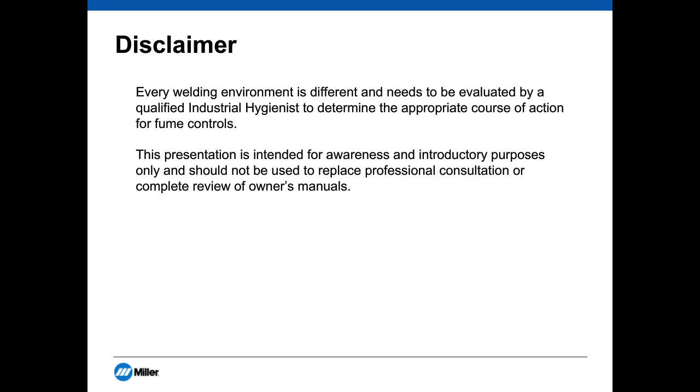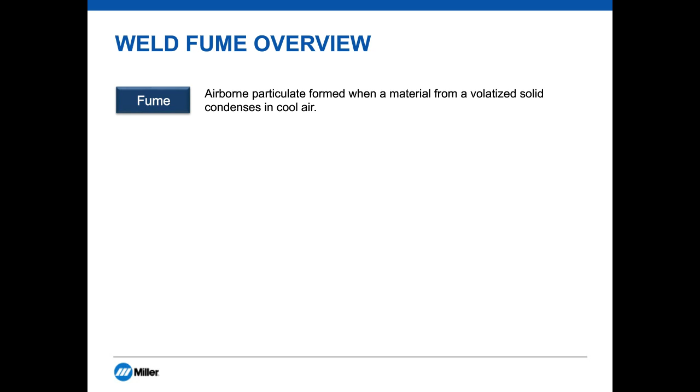The next term is a gas. We all know what gas is. It's one of the 3 basic states of matter: solid, liquid, or gas. Technically, the definition reads, it's a state of matter in which the material has very low density and viscosity. It can expand and contract greatly in response to changes in temperature and pressure.

A mist is a suspended liquid droplet generated by the condensation from a gaseous state to the liquid state, or by breaking up a liquid into a dispersed state, such as by splashing, foaming, or atomizing. Think of water mist.

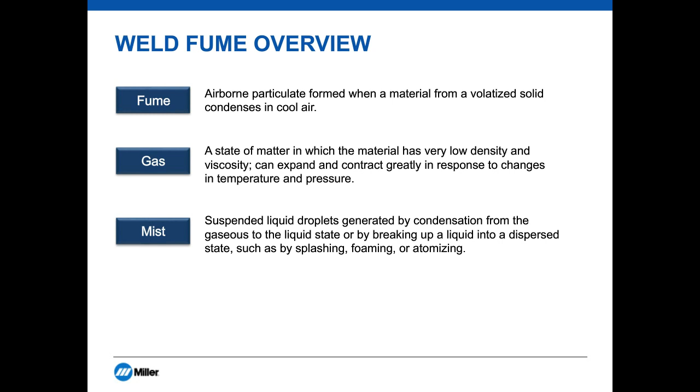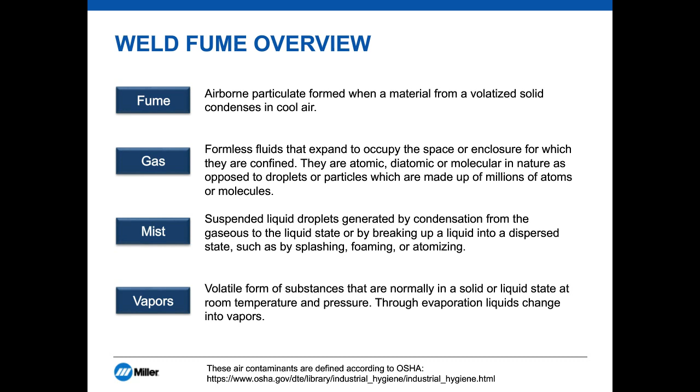Then a vapor. A vapor is a volatile form of a substance that's normally in a solid or liquid state at room temperature and pressure. Through evaporation, liquids can change into a vapor. Again, think of water vapor as opposed to water mist.

Let's talk about weld fume factors that can impact an operator's exposure. First is the type of welding process. We're going to talk more about these later in the program. Examples are arc, MIG, or TIG welding. The second factor that can impact an exposure is the base metal or filler metal used, and we're going to talk more about this in the next slide.

Thirdly is the location. Is the welding being done outside or is it indoors in an enclosed space? Fourth, welder work practices.

Fifth is air movement. Are there cross drafts in the room, or is welding occurring in a dead air space? And lastly, use of ventilation controls, either general ventilation or local exhaust ventilation.

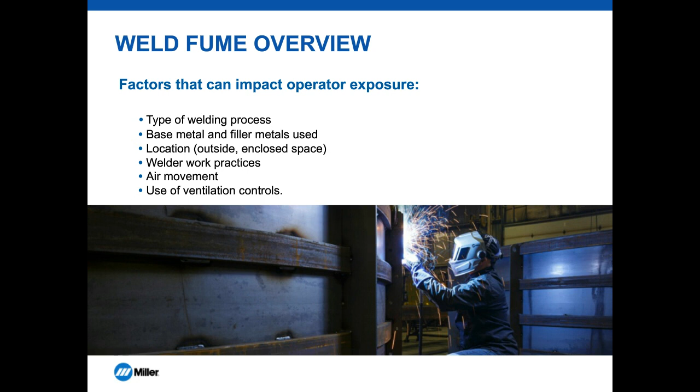I talked about common metals associated with welding. Let's talk about aluminum, mild steel, and stainless steel. These are the three most common base metals that people are welding on. Below that you see iron, nickel, and copper. These are some of the metals included in the welding electrode, whether it be a stick electrode or a wire electrode. I could add manganese, which we're going to talk about a little bit more later in the presentation.

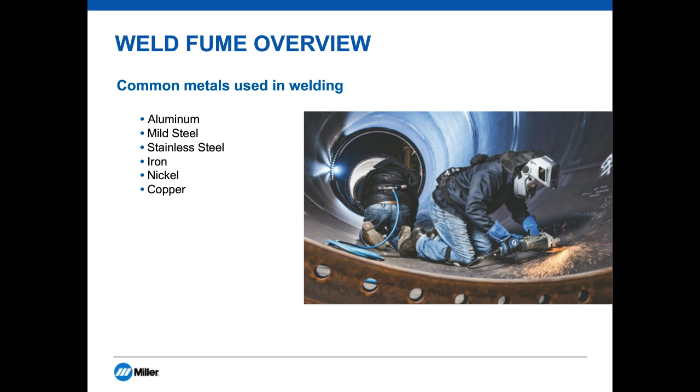There's several issues we can talk about in welding. How much welding is being done, for how often, and for how long. Again, what type of welding is being conducted? I already mentioned MIG, TIG, flux core, subarc. All of these generate different levels of fumes and different types of contaminants.

What is the base metal? Mild steel or stainless steel? There's a huge difference in fume generation depending on the base metal. I'm going to talk more about hexavalent chromium later in the presentation.

Where is the welding being conducted? Is it a well-ventilated area or a restricted or confined space? When are there changes that impact your environment? Is it a new or reconfigured workspace? Is there new equipment, new applications? Is it slow production or increased production? All of these are going to affect the level of weld exposure.

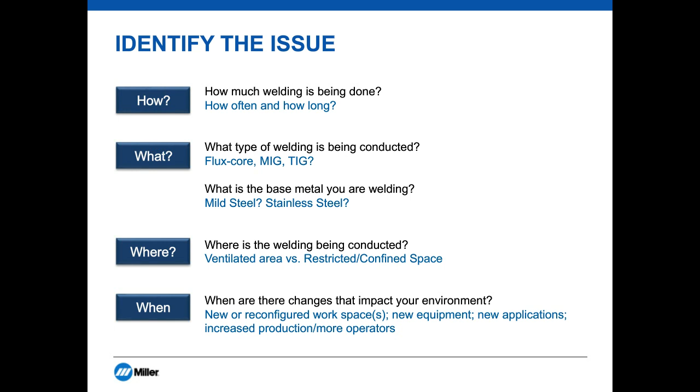Now let's talk a little bit about occupational exposure limits. There's lots of different occupational exposure limits. NIOSH sets limits. The American Conference of Governmental Industrial Hygienists sets limits. And then there's OSHA. OSHA has permissible exposure limits. OSHA, of course, stands for the Occupational Safety and Health Administration and enforces exposure limits for each individual metal, metal oxide, or gas found in the weld plume.

Two of the most important of these are hexavalent chromium and manganese. In 2006, OSHA issued its standard for exposure to hexavalent chromium, 29 CFR 1910-1026, if you want to look it up. It established a permissible exposure limit of 5 micrograms per cubic meter and an action level of 2.5 micrograms per cubic meter. Pay attention to those units. Again, these are in micrograms, not milligrams. Most occupational exposure limits are expressed in milligrams per cubic meter. Hexavalent chromium has a very low limit, so it's expressed as 5 micrograms per cubic meter.

Manganese is present in all welding electrodes, whether it be stick or wire. The current OSHA PEL for manganese was set all the way back in the 1970s, and it is a ceiling limit of 5 milligrams per cubic meter. A ceiling limit means that at no time should it ever be exceeded.

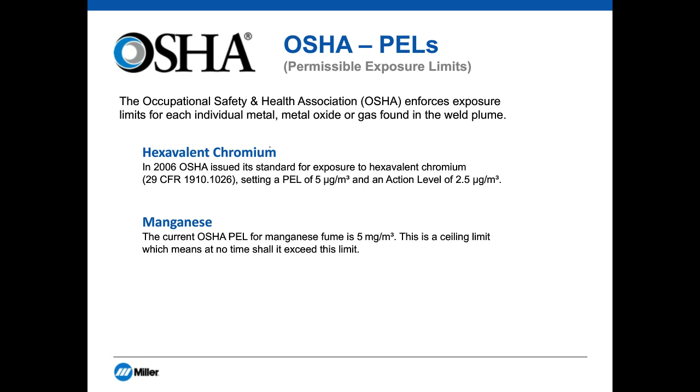A little while ago I mentioned threshold limit values. These are the limits established by the ACGIH, the American Conference of Governmental Industrial Hygienists. This is a professional society, not a governmental agency. This organization has been around since the 1950s, establishing the threshold limit values. When the OSHA Act was created, they adopted the 1968 TLVs, codified them, and wrote them into law. They adopted the numbers but changed the names from TLVs to permissible exposure limits. Over the 40 or so years since the original OSHA Act, there have been many updates and changes to the TLV list, so that now the TLV list is quite different than the current PELs, the OSHA limits.

For example, again, hexavalent chromium. In 2018, the ACGIH adopted a new TLV for hex chrome set at 0.0002 milligrams, and again, that would be 0.2 micrograms per cubic meter. For manganese, the ACGIH TLV changed to 0.02 milligrams per cubic meter as total particulate. So now the manganese limit is 250 times lower than the OSHA PEL.

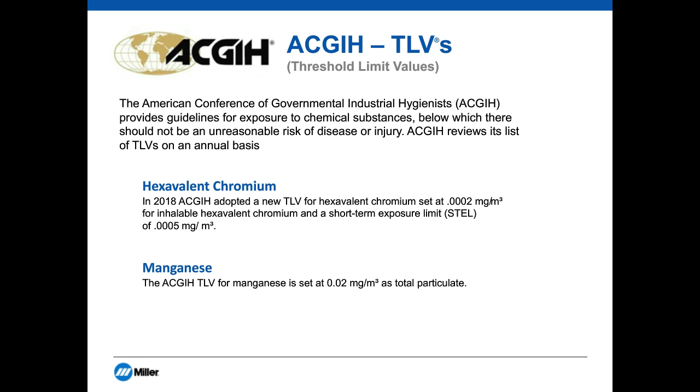These limits are important when you're doing an assessment of welding fume exposure. In order to do a proper assessment, you should contact a qualified health and safety professional or an industrial hygienist. It's best to use a certified industrial hygienist, a CIH. This certification is issued by the American Board of Industrial Hygiene, the ABIH. In order to find a qualified hygienist, you might ask your corporate staff. Another source would be insurance brokers or underwriters, or check the AIHA consultants listing for a qualified consultant.

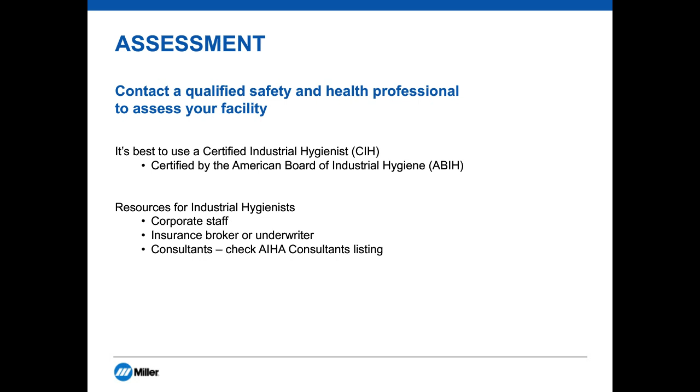Next, we're going to talk about the hierarchy of controls, which is Industrial Hygiene 101. On the next slide, you see the hierarchy of controls. The first and best solution for any problem is the elimination or substitution of a less hazardous material for a more hazardous material. The next best solution are engineering controls, whether it be local exhaust ventilation, general ventilation, or some other type of engineering control. Followed by work practices and administrative controls. And then finally, the last line of defense is personal protective equipment.

That's it for me for now. I'll come back on later, but I'm going to turn it over to the next speaker at this point. Thank you, Bert.

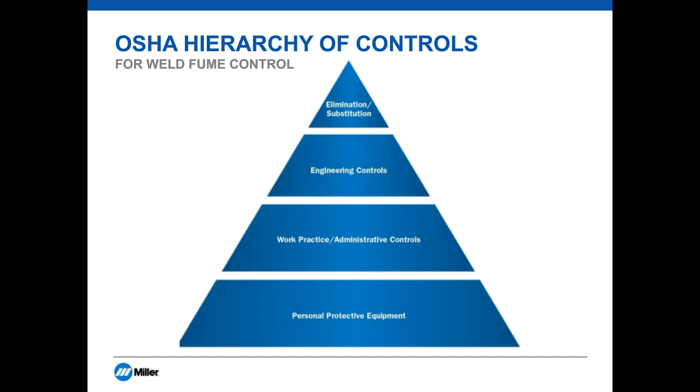This is Susan Fiore, and I'm going to be talking today about process modification and substitution. Process modification and substitution is the first step in the hierarchy of controls. It is also the most effective since it removes or reduces the danger from the environment, thereby protecting not only the welder, but also those workers in the surrounding area. The first option for process modification is to eliminate welding, but since this is a welding safety presentation, I'm not going to get into that.

Other options include modifying the process, which can include changes to the process itself, as well as changes to the welding parameters. Automation is another process modification that can help to reduce exposure to welding fumes. Changes to the materials, including the filler metal, the shielding gas, and the base material, are another way to reduce welding fume exposures. Keep in mind that these sorts of changes may require you to recertify your welding procedures.

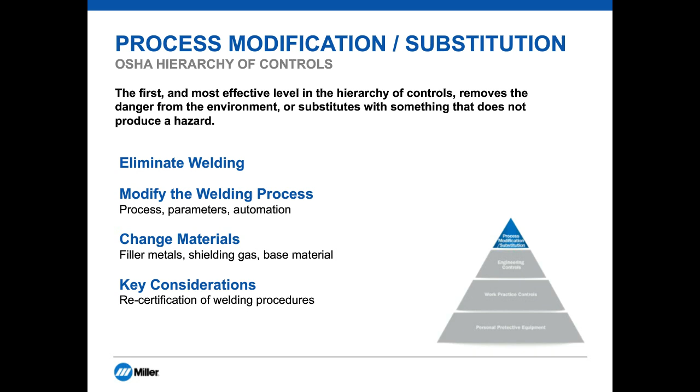This slide shows how changing the welding process, and in some cases the shielding gas, can help to reduce the amount of fume that is generated. Processes like gas tungsten arc welding and submerged arc welding tend to be very low in fumes. Unfortunately, GTAW is also very low deposition and requires a high degree of welder skill. Submerged arc welding, on the other hand, can only be used in the flat and horizontal position and may require a large investment in equipment.

Solid wire gas metal arc welding tends to be relatively low fuming, especially if pulse transfer is used with high argon mixtures. I'll talk a little more about that later on. There are a variety of flux and metal cored welding products, some of which are designed specifically to be low fuming, and others that may target specific elements, such as manganese or hexavalent chromium, in the fume.

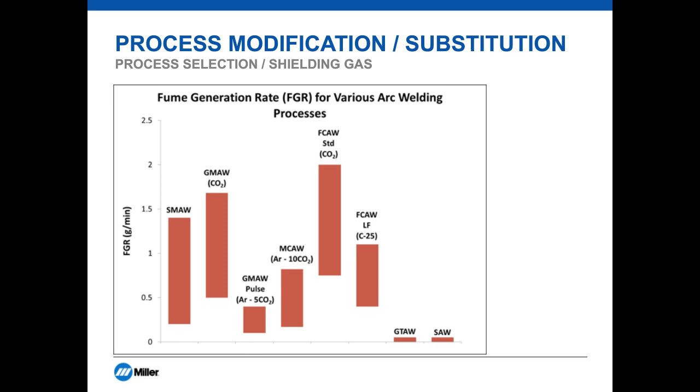This slide shows the effect of shielding gas on fume generation rate for gas metal arc welding. The results are similar for flux cored arc welding. The bottom line is that the less active the shielding gas is, that is, the higher the argon content, the lower the fume will be.

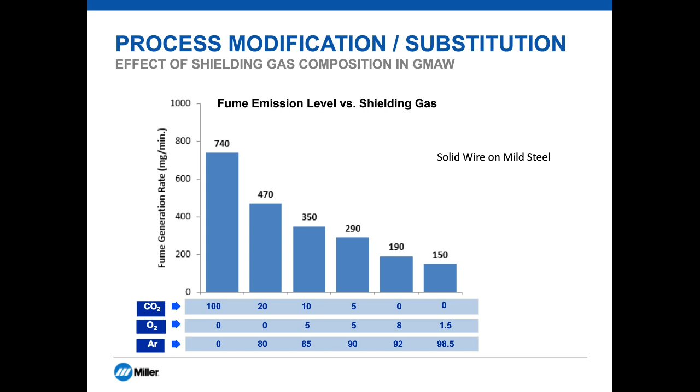You should always do exposure testing in your own facility to verify the results due to the large number of variables that affect fume exposures. I think Bert mentioned some of these variables, but they include things like the specific welders and how they position themselves relative to the fume plume, the welding parameters, the room dimensions, local exhaust ventilation, the number of welding operations, etc.

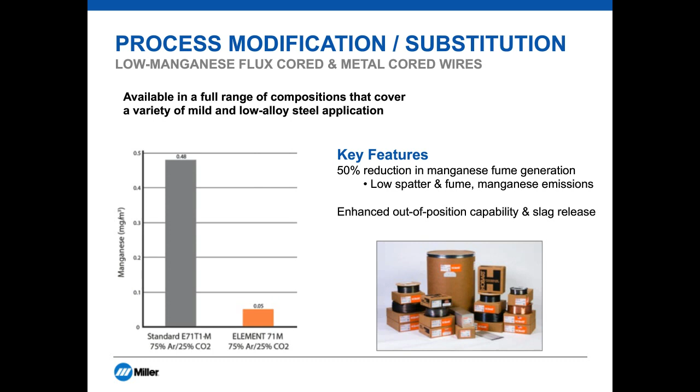As I mentioned earlier, the type of weld metal transfer can have a significant impact on the fume generation. Modified short-circuiting transfer provides a more stable arc than conventional short-circuiting transfer, which can help to reduce fumes. It's also been found that switching from conventional spray transfer to pulse transfer in gas metal arc welding can significantly reduce welding fume. Keep in mind, though, that a simple change to pulse may not result in the expected decrease in fume generation. You may need to optimize the welding parameters to get the desired results.

You should contact your welding supplier if you need assistance. Also note that we do not see a similar reduction in fume when we use flux and metal cored wires with the pulse transfer.

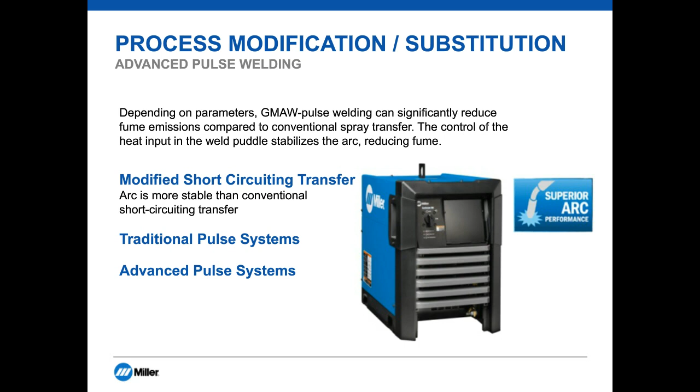In summary, there are many advantages to lowering welding fume generation by modifying or changing the welding process, the greatest being that it helps to protect the welder as well as the people working in the surrounding area. It can also be a way to target specific fume constituents, such as manganese. And finally, these types of changes are generally relatively simple to implement.

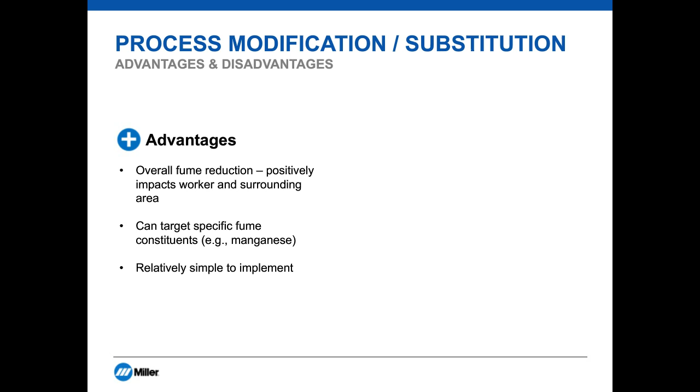Some of the disadvantages of modifying the process include the possible need to invest in new equipment, as well as the need for additional training or requalification. You should also keep in mind that not all processes will work in all situations. Things to consider include the deposition rate, positional capabilities, and mechanical property requirements. Finally, if you are considering switching shielding gas, keep in mind that argon gas mixtures are typically more expensive than CO2.

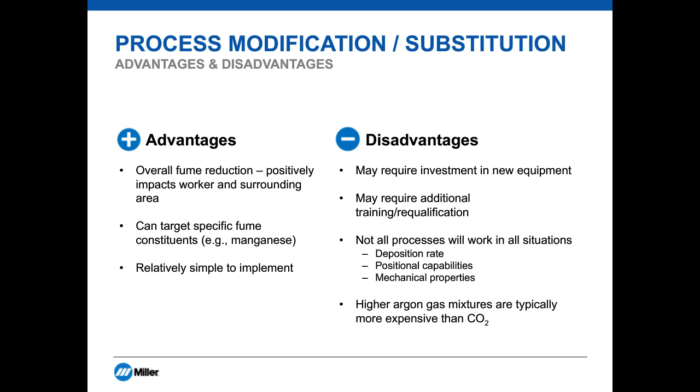The second tier on the hierarchy of controls is engineering controls. Engineering controls are the second most effective level of control. Implementation means controlling the hazard through a physical change to the workplace or a change in the design of equipment, such as increased ventilation. Types of engineering controls include local exhaust ventilation, process enclosure, and general ventilation and filtration.

Local exhaust ventilation, also called source capture, means the contaminants are removed at their source before they reach the welder's breathing zone. Examples include extraction arms, backdraft hoods, downdraft tables, and fume extraction guns. Process enclosure means creating a barrier, such as an automation hood, between the operator and the process. Finally, general ventilation and filtration would include things like HVAC systems that move large quantities of air to dilute or filter out contaminants.

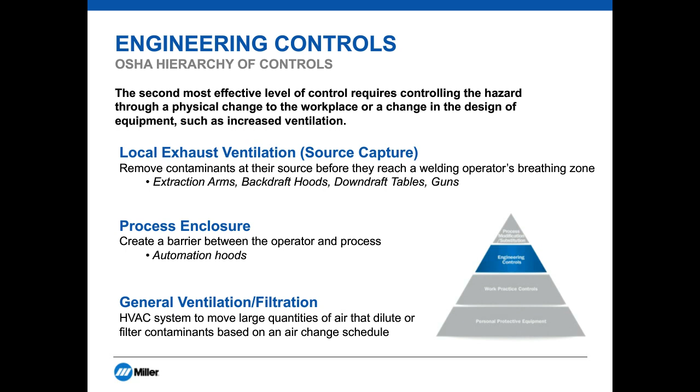Thanks, Susan. A little bit more about fume extraction MIG guns, and specifically, how do they work? Well, they capture fumes generated by the welding process right at the source, over and around the weld pool. They can be tailored to best meet needs of a specific application or to welder preferences. And they're ideal when the welder is in a tight or confined space or must move often to complete welds on a large part.

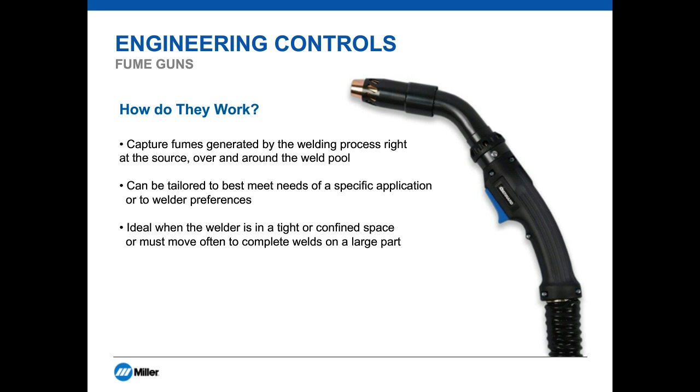A little bit about best practices when using a fume extraction MIG gun. It's always good practice to pause at the end of each weld to evacuate any residual fume. Frequently inspect the front of the gun for damage or spatter buildup that could inhibit fume extraction, and routinely inspect the vacuum hose for cuts or tears, as this will negatively impact the gun's ability to extract fume.

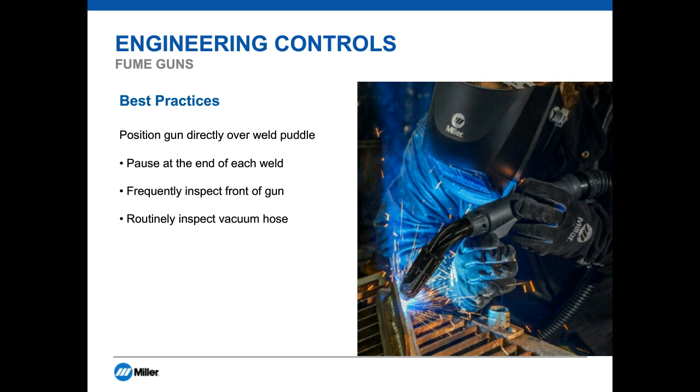Fume extraction guns are available in a variety of amperages and handle designs. Common amperages for fume extraction guns range from 300 to 600 amps. Keep in mind that amperage is tied to gun weight. The higher the amperage, the more copper required in the power cable, and therefore the heavier the gun will be. Due to this additional weight, use the lowest amperage gun possible that will still allow the job to be completed. Along with the added weight, higher amperage guns typically cost more than lower amperage guns, so it may be a waste of money to buy more gun than necessary for the application.

However, automatically buying the lightest gun available may not provide the amperage or durability needed for the application. Some lighter and more flexible guns aren't durable enough for heavy industrial applications. Always consider a gun's duty cycle rating, and keep in mind that it's a balancing act between gun weight and durability when choosing a fume extraction gun.

Some features to consider. An adjustable vacuum chamber provides better joint access and visibility and helps welders dial in vacuum flow to eliminate porosity. A suction control valve can work in conjunction with an adjustable vacuum chamber to balance suction with shielding gas flow to protect against porosity. A flexible and crush-resistant vacuum hose eliminates the need for a protective hose cover in many applications while reducing overall gun weight and increasing flexibility.

Tailoring the gun handle and neck to the application and welder preference can help improve weld access and reduce operator fatigue. A common consumable platform means many consumables used on a standard MIG gun or even a robotic MIG gun can also be used on a fume extraction MIG gun. When fume gun replacement parts, such as nozzles, contact tips, and gas diffusers, can be the same as those used on standard MIG guns, this offers greater flexibility and helps reduce the company's consumable inventory.

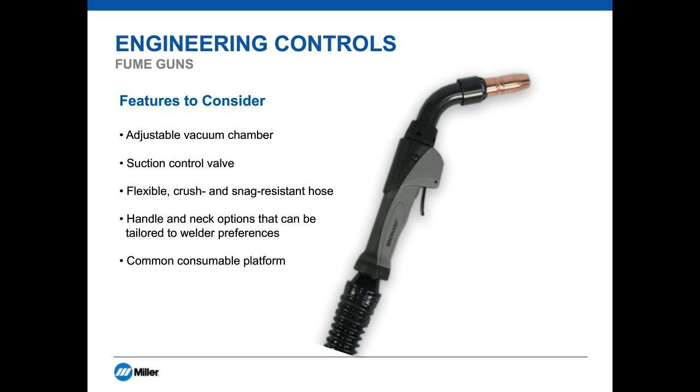Thanks, Andy. So I'm going to be talking here about some of the different solutions that are available for different uses. Fume guns are a primary source capture device. However, they might not be a viable option for all the weld processes or for your specific application. So you may want to be able to consider different applications for your work environment.

So for processes such as welding, brazing, and cutting, another form of engineering control is fume extractors, also known as a type of local exhaust ventilation, which can be effective at capturing the welding fume before it reaches the operator's breathing zone. So let's take a little bit deeper look at several types of fume extraction systems that are available to consider. There are portable units that are used in areas where the weld environment and location constantly changes, such as maintenance and repair or light-duty welding, where portability is key.

Mobile systems are great for medium and heavy welding operations that are in open work environments, such as open bay or floor areas where mobility is key. There are stationary systems that are also used in medium and heavy welding that takes place in larger weld cells or an area that is always consistent, where floor space might be limited and where wall-mounted or pedestal mounting is required. Centralized solutions for source capture are optimal for heavy and larger weld areas. This is normally where the area might have multiple cell booths and multiple extraction arms that are used with only one collector for a filtration device.

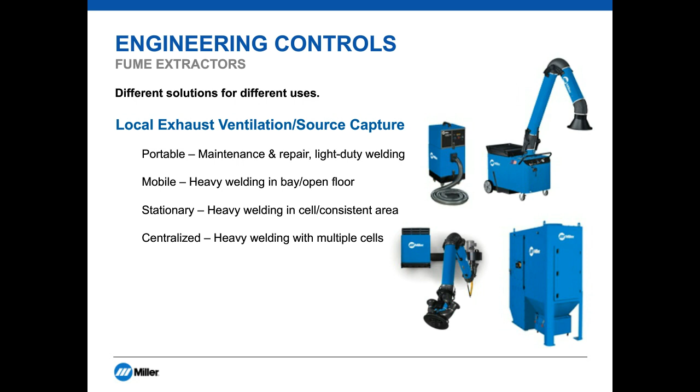A second method related to fume extraction is considered general ventilation. Now, this method is typically seen in HVAC systems which use ambient air cleaning. These systems are very effective in moving large quantities of air that dilute the contaminants or filter them based upon air exchanges within the facility. And that's great for the entire shop environment. However, these systems do not collect weld fumes at the source, and therefore it would be necessary to evaluate other means of protecting the welding operator, such as respiratory protection.

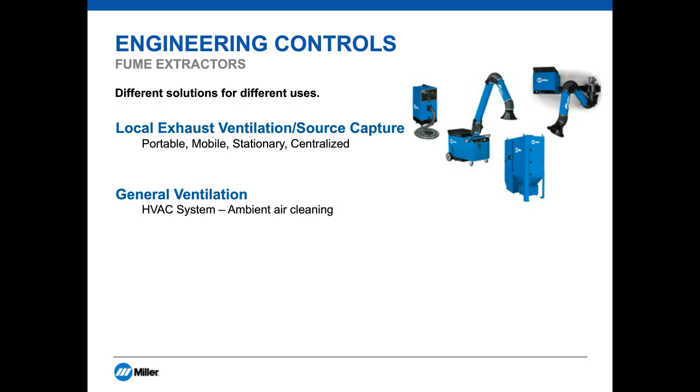However, this method does require a source of filtration and collection for the welding fume. Most commonly, this method is used with a fume extraction hood covering the entire area of the weld cell, which is then connected to a filtering mechanism such as a stationary or a centralized filtering system, which is able to capture the welding fume over the weld area.

However, when selecting the appropriate fume collector for your environment and your process, there are a few things that you need to be aware of that may impact the performance of the device itself. Depending upon where the welding is taking place or the size of the weldment and the access to the joints, those factors may impact the performance of the extractor, such as a work environment that has open bay areas with large doors or mechanical fans that can cause the weld plume to travel to other areas of the plant, impeding collection by the extractor.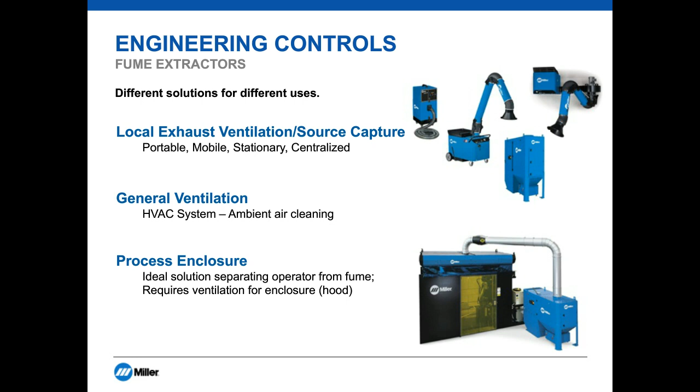Another consideration in selecting your fume extraction device is the type and amount of welding that you're doing, and how that would impact the performance and efficiency of the filter element in the collector itself. These factors also affect the life of the filter and the replacement and consumable costs.

In general, there are two types of filters, disposable or self-cleaning, that are primarily used in fume extraction systems. Disposable filters are best suited for light-duty applications with lower arc-on time, such as maintenance and repair operations, or for specialized jobs that require frequent use and replacement of filters. These filters normally have a lower initial cost of investment, but they also have a lower filter life.

Self-cleaning filters are best suited for heavy to medium weld applications, where the fume extractor has a mechanism to remove the weld particulate off the filter. That then deposits into a collection basin and maintains a consistent airflow during use of the filtering system. This method also increases the efficiency of the filter and increases filter life up to about 8 times longer than a disposable filter, reducing labor costs and cleaning.

Although self-cleaning filters are higher in cost initially than disposable filters, usually you can receive a return on investment that can be recognized after approximately 6 cleanings of the filter.

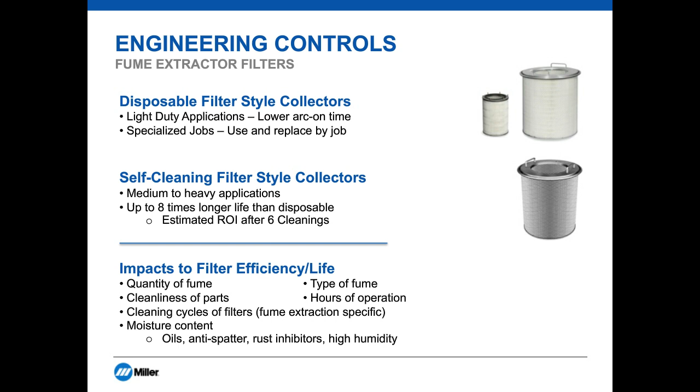Now, in reviewing the engineering controls for fume extractors, these methods have advantages and disadvantages in use and performance. It's important to remember, as Susan mentioned, that not all solutions are going to be feasible in all environments, and there are many considerations in evaluating source capture for your workplace.

But some of the key advantages are that these engineering controls actually capture the weld fume before reaching the breathing zone of the operator. As a result, the workplace environment is improved and regulatory compliance is increased. There are several solutions for source capture and fume extraction, as we reviewed, for almost every welding application out there.

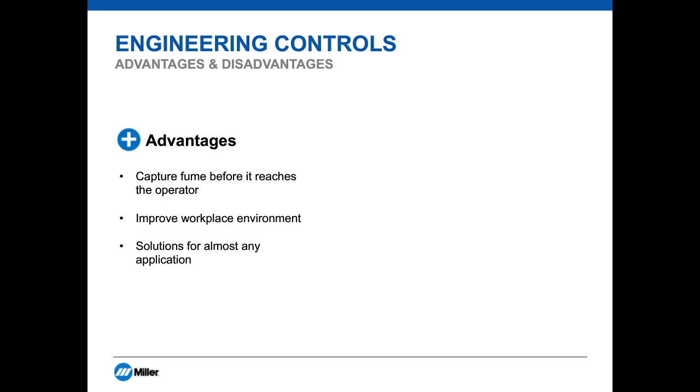Although there are some limitations and disadvantages we need to be aware of. Some plants have footprints with space constraints and may require physical changes to the weld environment to accommodate implementing engineering controls, such as general ventilation, centralized systems, or moving fume extractors around the plant.

Also consider the labor and consumable costs for maintaining these mechanical systems, implementing routine maintenance schedules for filter replacements, and proper disposal of the welding fume. There's also the possibility of loss of production due to the amount of time required for the operator to interface with a source capture arm, which can be a disadvantage in performance.

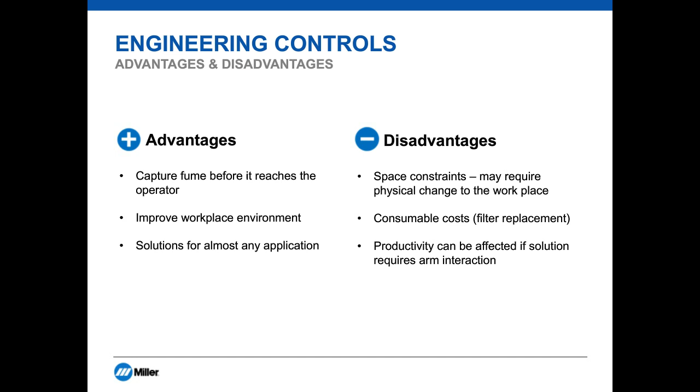I'm going to now walk us into the third tier of the OSHA hierarchy of controls, which is work practices, also known as administrative controls. These controls limit the worker's exposure by scheduling reduced work times in contaminated areas or by implementing other work practices or policies. Generally, administrative controls can be difficult to implement and maintain, and they're not always reliable, as these have limitations and the hazard is not removed. It's always best when administrative controls are used in addition to engineering controls.

So in relation to the weld environment, let's take a look at a few high-level activities or changes to workplace procedures and the way people work that can limit or prevent exposure to welding fumes. Training on proper body position to keep the welder's head out of the plume will limit exposure to welding fumes at the breathing zone. Also, training on proper positioning of weld equipment such as mechanical fans and fume extraction arms to work effectively will also reduce limits to exposures.

Increased visibility and optical clarity on welding lenses will allow the welder to see more clearly and encourage better body positioning. Proper training on the weld process and proper use of welding equipment can reduce weld spatter, fume generation rates, overwelding, and the need for cleanup and rework.

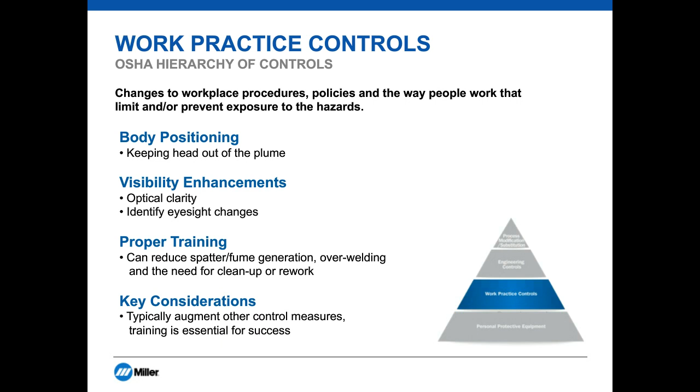Of course, when we're making changes to workplace policies, there are impacts that should also be considered. A few of those advantages, as mentioned, is that increased productivity and reduced labor costs can result from training on proper weld technique, reducing scrap and the need for rework.

Enhancing visibility for the operator can lead to higher productivity rates and lowering the risk of exposure to harmful rays or debris in the eye. Training on best practices in the weld process can also result in increased safety and increased compliance ratings.

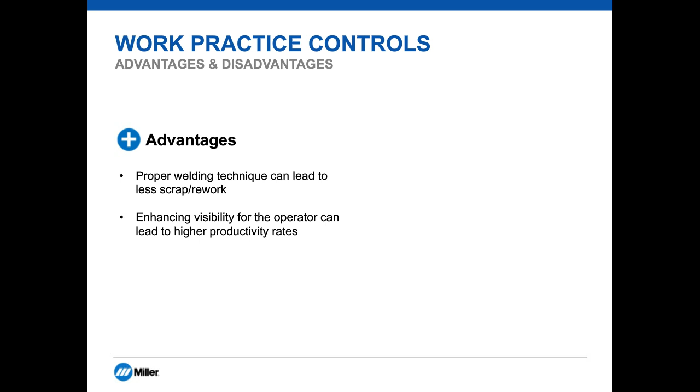The largest disadvantage in implementing an administrative control or changes to workplace policies is that implementing a training program and introducing equipment may require significant investment in allocating dedicated resources and time to effectively manage and maintain these programs over time as the changes occur.

Some administrative controls will also require physical changes in the weld environment and operator behavior. So collaboration and welder acceptance will be key in order to successfully implement these changes, which in some environments may be difficult to achieve.

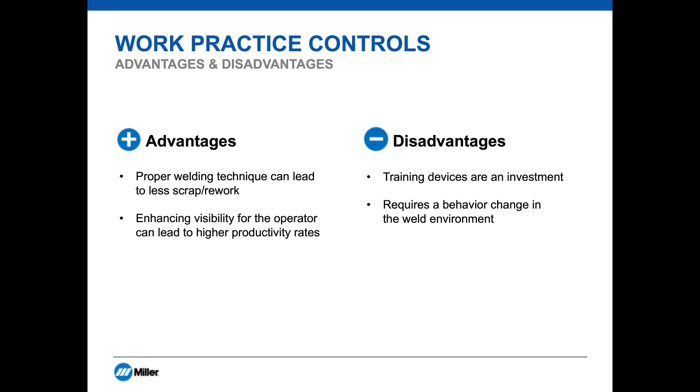We're also going to talk about the fourth tier in the OSHA hierarchy of controls, personal protective equipment, and as it relates to the welding environment, we'll talk about respirators.

It's important to note that OSHA states that PPE, or respirators in this case, should only be required when all other methods of controls have been explored. Respirators do create or impose a barrier between the worker and the hazard, preventing them from inhaling hazardous substances or contaminants.

It's very effective in protecting operators from inhaling contaminants in the weld environment, such as dust, fumes, vapors and gases. However, not all respirators are effective in protecting against all contaminants, and careful selection needs to be considered for each application in the weld environment.

OSHA states that there are specific recommendations for when respirators should be implemented as a method for protection, such as if engineering controls are not feasible, or if the levels of exposure are not reduced to OSHA PELs or below through other control methods, such as engineering or administrative controls.

Respirators can be used in maintenance or emergency situations and during the installation of other fume management solutions, such as local exhaust ventilation or centralized extraction systems.

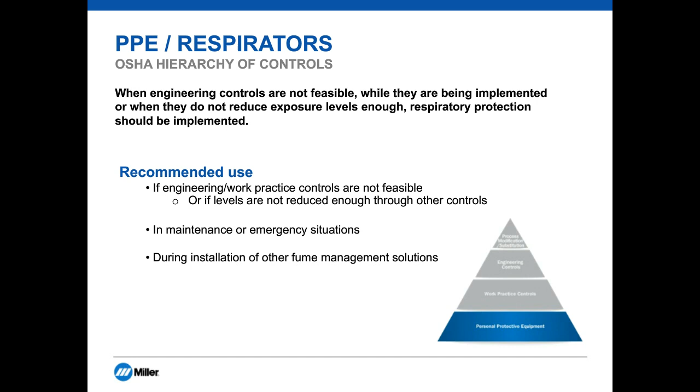Now, when respirators are implemented as a means of personal protective equipment, there are very specific responsibilities for employers to identify, select, establish, and implement a formal respiratory protection plan. That can be found in OSHA 29 CFR

1910.134. What OSHA states is that a respirator shall be provided to each employee when such equipment is necessary to protect the health of such employee. The employer shall provide respirators which are applicable and suitable for the purpose that it was intended.

And the employer shall be responsible for the establishment and maintenance of a respiratory protection program, and that program shall cover each employee required to wear and use a respirator.

This respirator program, pretty in-depth, must also address how to find out what hazards are present in your environment, how much protection the worker is going to need, and describe how to wear, maintain, and store the respirator after use. The program should be administered by a suitably trained program administrator.

It's a pretty in-depth program, and we're going to cover some of the critical steps here for compliance.

In 2019, one of OSHA's top 10 violations, ranking at number 5, was the Respiratory Protection Program, totaling 2,400 violations. Some of the most cited issues were failing to establish a program, failing to perform required fit testing, and failing to provide medical evaluations.

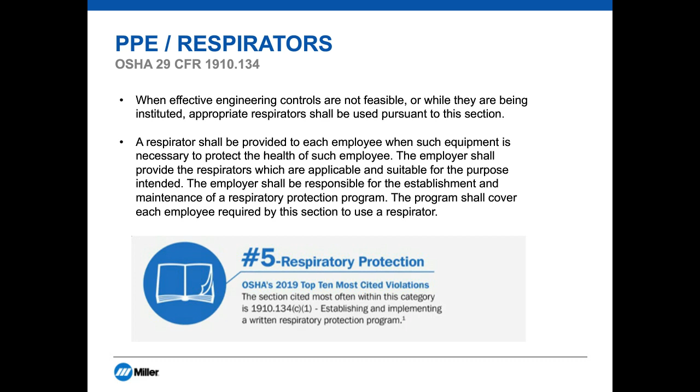Now, there are two uses of respirators within a facility, the first being a mandatory use and the second being voluntary. So when a mandatory use of respiratory protection is required, the program must include these critical factors:

Respirator selection, the use and maintenance and operation of that protective equipment. Medical evaluations are to be performed to examine the medical and physiological fitness of the workers before they're assigned to work in the areas where the respirators are required.

This is normally performed through a questionnaire that can be found in the standard itself, and then possibly followed up with a physical examination to be certain that the worker is physically fit to carry out the work task while wearing the respiratory equipment. Fit testing is required for all tight-fitting respirators under the mandatory requirement, and workers need to be clean-shaven while wearing the respirators.

So this is an ongoing process, and the program should be updated as necessary to reflect any changes in the workplace conditions that might affect the respirator use. So it's really important and key to always do air sampling to ensure air quality is maintained below OSHA PELs following any process changes within the weld environment. And those process changes could include change in the process, change in the base metal or materials, and change in any of your engineering or control methods that have been used.

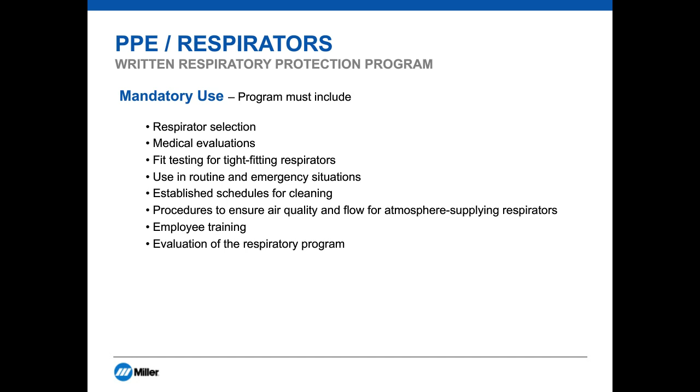Voluntary use. Not all environments require the use of respirators, and using a respirator can be an effective method of protecting against designated hazards when properly selected and worn. And some employers will encourage the use of respirators even when exposures are below the PEL, to provide additional level of comfort and protection for the workers.

And sometimes you might find that your own employees will be wearing respirators to avoid exposures to hazards, even though the amount of the substance in your environment does not exceed OSHA's limits.

So if you're going to be providing respirators for voluntary use or employees provide their own respirators, there are certain precautions that need to be addressed through a written respiratory protection program. However, it's not as extensive as the mandatory use. You can find the requirements for the voluntary plan on Appendix D of the 1910.134 respiratory standards. Note that that does not apply to wearing dust masks in the work environment.

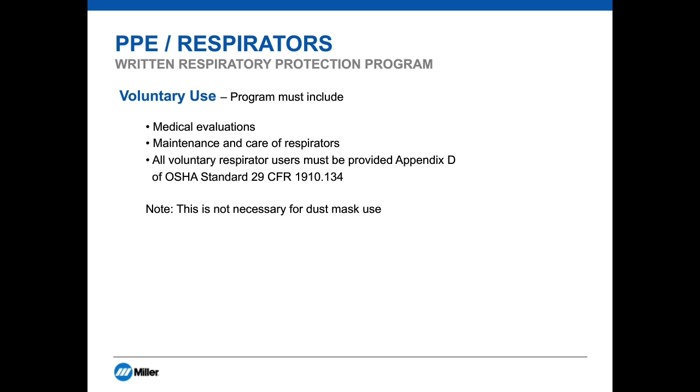Now, there are some respiratory terms that are really important in the selecting of an appropriate respirator for your work environment. Different types of respirators offer different levels of protection, and these three major terms actually interrelate with one another to be able to guide you to select the appropriate respirator for use and protection in your weld environment.

And the first term is the assigned protection factor, which is the measure of the respirator's protection capability. So this actually applies to the respirator itself and to the level of protection or class of respirators that is expected to provide the employee when the employer implements a continuing, effective, and respiratory protection program. Now, this is a number that is assigned by OSHA to the respirator for the level of protection from the airborne exposures. So the larger the number, the greater the protection.

For example, when properly used, a respirator with an APF of 10 will reduce your exposure levels to 1/10 the concentration of the contaminant in the air. Similarly, a respirator with APF 50 will reduce the exposure to 1/50th of the concentration of the contaminant in the air. So the second relative term is the permissible exposure limit, and Bert had referenced that earlier, and that is

The acceptable amount or concentration of substance in the air in the work environment. Now, OSHA has established PELs that are intended to protect the worker from any adverse health effects related to the health exposures. And a third term used in selecting respirators is maximum use concentration.

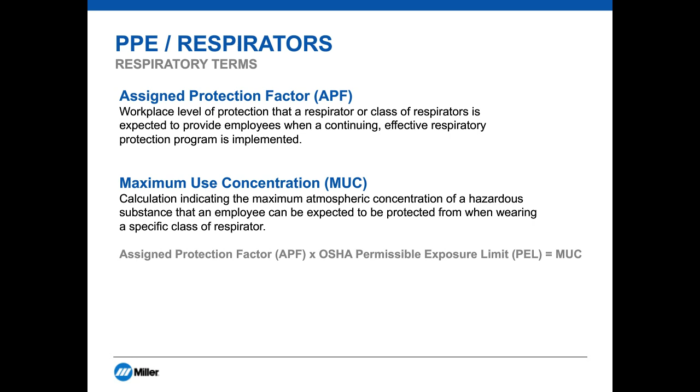So let's take a look at a few of the respirator types found in the welding environment. There are two: the first is the air purifying respirator, and the second is the atmosphere supplying respirator, which we'll discuss shortly. Air purifying respirators are shown here.

They contain filters or cartridges that actually remove the contaminant in the air by filtering out particulates such as dust, metal fume, or mist, creating a barrier to the breathing zone when properly worn.

The most common type of respirator used for protection against welding fume and solid particulates are disposable particulate masks, such as dust masks, which have an APF of 10.

Reusable half masks with replaceable filters, many of which are tight-fitting and require fit testing, also provide an APF of 10. There are powered air purifying respirators which have a loose-fitting hood or a helmet with an auto-darkening filter lens.

and a belt-mounted blower that filters the air from the weld fume and delivers fresh air into the hood. These are not tight-fitting, they do not require fit testing, and they provide higher protection factors of 25 or 1,000.

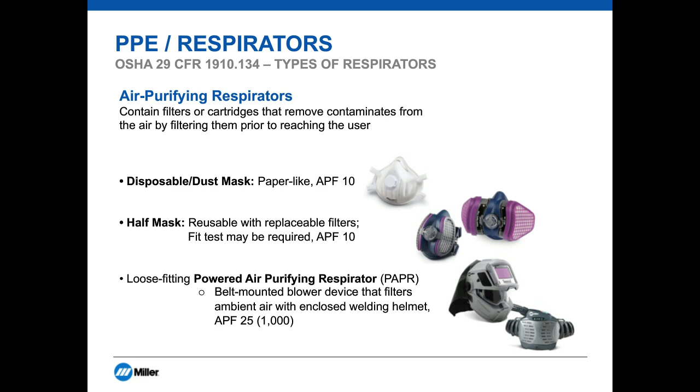Now, the second type of respirator we talked about was atmosphere-supplying respirators. These systems provide filtered grade D breathable air from an uncontaminated source.

One of the most common systems found in the welding environment is the supplied air respirator, or SAR, which delivers filtered air from an external source, such as an air compressor, through a purification panel board or box, and a supplied air hose to the welder's helmet.

Additional configurations may include a Grade D cylinder of breathable air as the air source, or a tight-fitting mask as well. Many of these systems provide the benefit of continuous airflow delivered into the hood, can be air-conditioned for relief in hot environments, and provide maximum protection in confined spaces.

These systems can provide anywhere from an APF of 25, 50, or 1,000 as well.

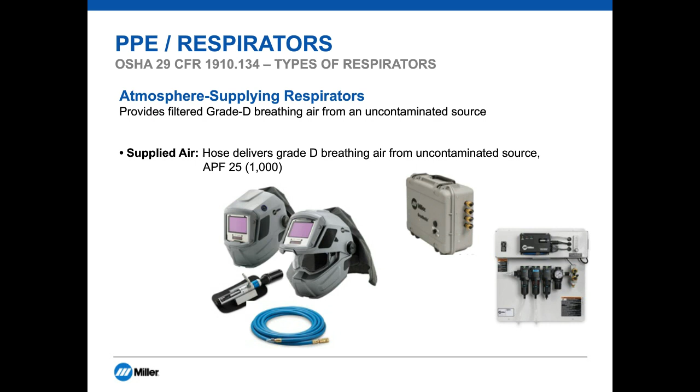Within the respiratory protection offerings, there are two classifications of respirators, as we talked about briefly: tight-fitting respirators and loose-fitting respirators. Each of them have certain features and requirements under the OSHA respiratory protection standard.

Tight-fitting respirators, such as the half mask or a full-face respirator, have a respiratory inlet covering that forms a complete seal between the respirator's facepiece and the user's face. Fit testing is always required for mandatory use of these respirators, as is being clean-shaven, to ensure they fit properly and provide the APF expected of the assigned level.

There are two methods of fit testing that have specific protocols under the OSHA standard: qualitative and quantitative fit testing. Qualitative fit testing is a pass or fail test method that uses the sense of taste or smell, or the user's reaction to an irritant, in order to detect leakage into the facepiece. Quantitative fit testing uses a machine to measure the actual amount of leakage into the facepiece itself.

Quantitative fit testing can be used for any type of tight-fitting respirator. There's usually a probe attached to the facepiece that connects to the machine to calculate the quantity of air that is leaking. Again, there are specific protocols under the OSHA respiratory standard for each of these fit testing methods that must be followed.

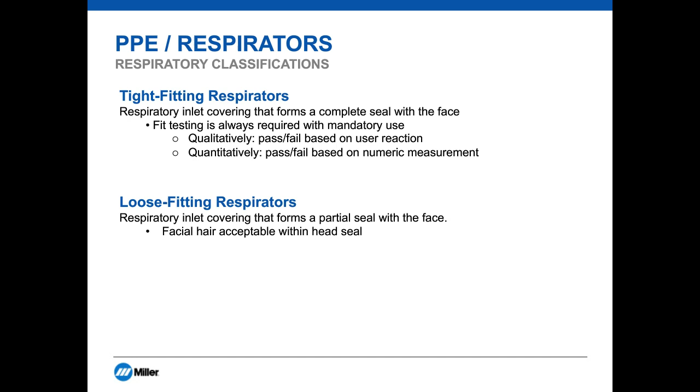Now, it seems that choosing a respirator can be a complicated matter, but with the guidance of an experienced safety professional or occupational hygienist, or someone who is very familiar with your actual workplace environment, the selection of the proper respirator for your welding environment can actually provide many benefits. The decision includes considering the limitations and the types of respirators that we just talked about.

But some advantages are that respirators, when appropriately selected and worn properly, create a barrier from contaminants entering into the user's breathing zone. Some respirators, such as PAPRs and supplied air systems, provide coolness in hot environments, producing heat stress relief and productivity. These also aid in reducing fogging of safety glasses and welding lenses in humid environments. Using respirators with hoods and helmets can also increase safety for eye and face protection and meet compliance requirements with more stringent PELs or TLVs that are ever changing.

While the largest disadvantage in the consideration of implementing respirators as a means of protection is the effort needed to comply with the OSHA standard for respiratory protection. As a last means of protection according to the OSHA hierarchy of controls, engineering and administrative controls should always be explored first. Implementing a written respiratory protection plan is a significant investment of time and resources to develop and manage, and change, as it is an ongoing process.

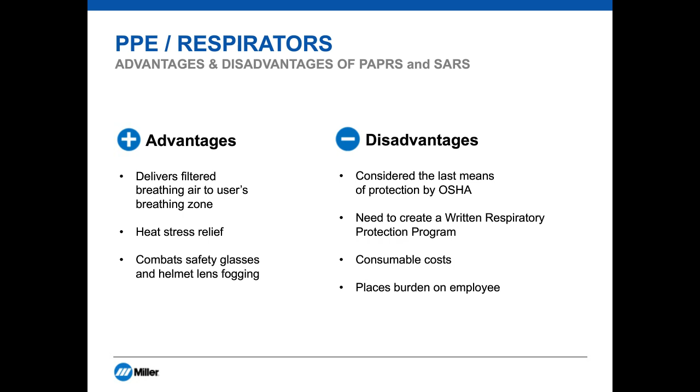So today we've covered a multitude of feasible and effective control methods of the OSHA hierarchy of controls as it relates to the welding environment. Hopefully we've provided you with some insight and guidance on evaluating solutions that might be right for your welding environment. A few key thoughts, though, before we close and before I turn it back over to Bert.

Keep in mind that this is a tiered approach toward a dynamic result. There are multiple solutions that may be necessary to reach your compliance goals, and evaluation of these control methods is an ongoing process and may require testing and retesting, especially as the workplace and regulations continue to change. Success for implementation is a collaborative effort among a team of manufacturing, engineering, production, and safety resources, which would create the best desired results for your weld environment.

So, which solution is right for you depends on the dynamics of your weld environment. Now I'm going to turn this back over to Bert so he can summarize our session for today.

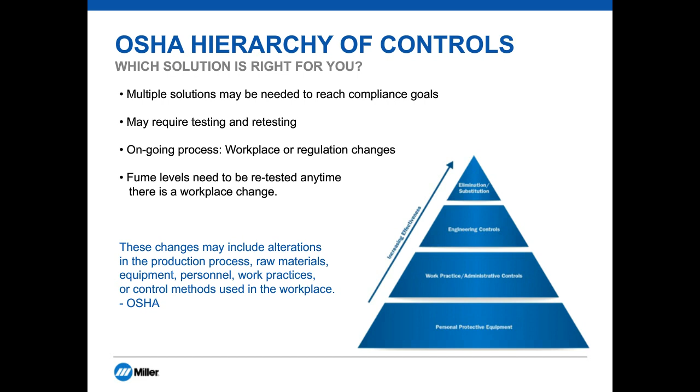Again, a quick review of the overall process. It's not as complicated as people think. Remember the hierarchy of controls, starting with substitution of a safer way of doing it, followed by engineering controls, work practices, and PPE. It's very important to control the air quality in the plant, not only for the comfort of the people doing the welding, but for compliance with regulatory obligations.

The benefits of controlling your air quality include reducing indirect costs, such as lowering insurance premiums, protecting you from OSHA inspections and fines, and it helps to improve the recruitment and retention of skilled workers.